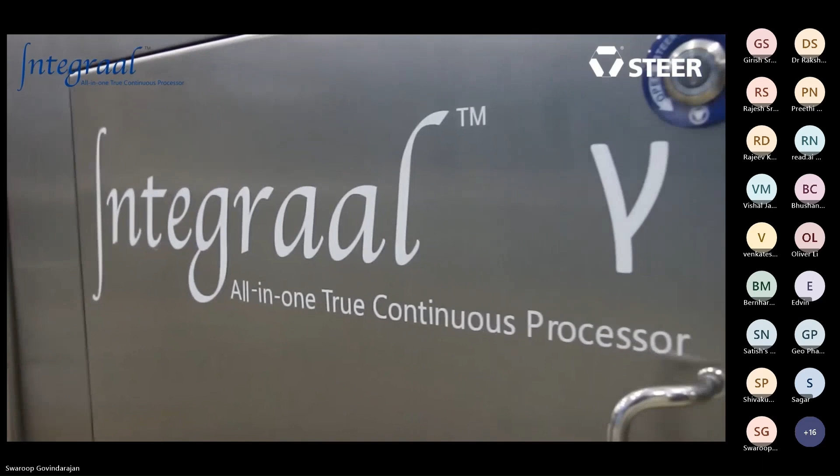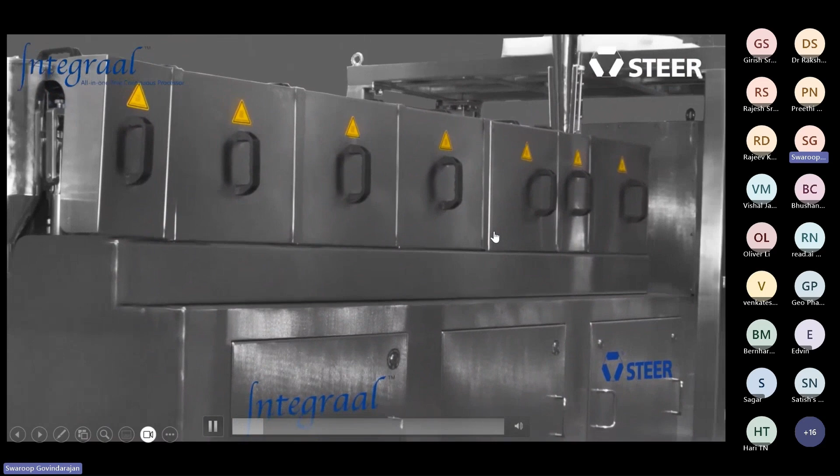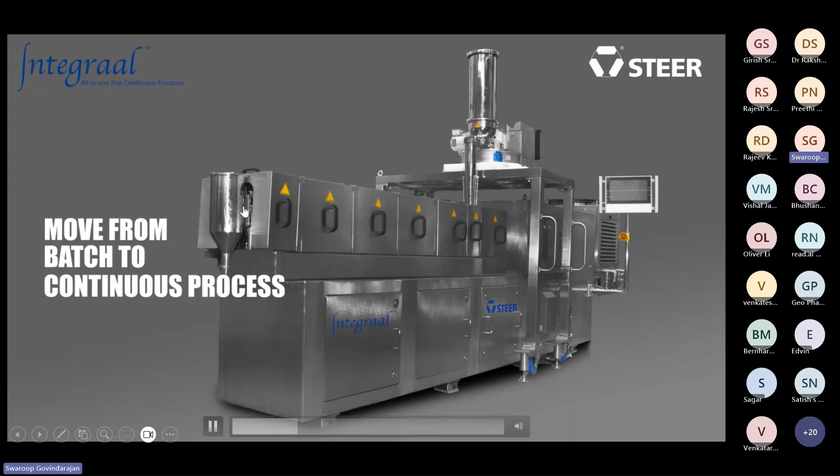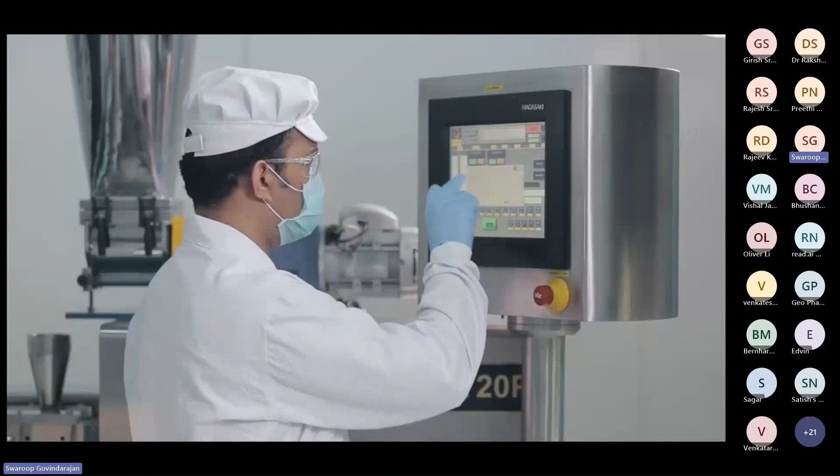Technologies. Our advanced processes and platform technologies change the way medicines are made. The pharmaceutical industry faces a dire need to move from batch to continuous processes in order to safeguard from regulatory stricture disrupting the business. By using a self-contained, self-cleaning vessel that can transform the bulk material properties in a single step during a very short time interval, we are addressing the most pressing need of the industry in making optimized granules towards preparing the final dosage form. The manufacturing overheads, footprint, and number of processing steps are vastly reduced, bringing long-term sustainability and overall equipment effectiveness. There is greater energy efficiency and negligible waste management, leading to a greener process.

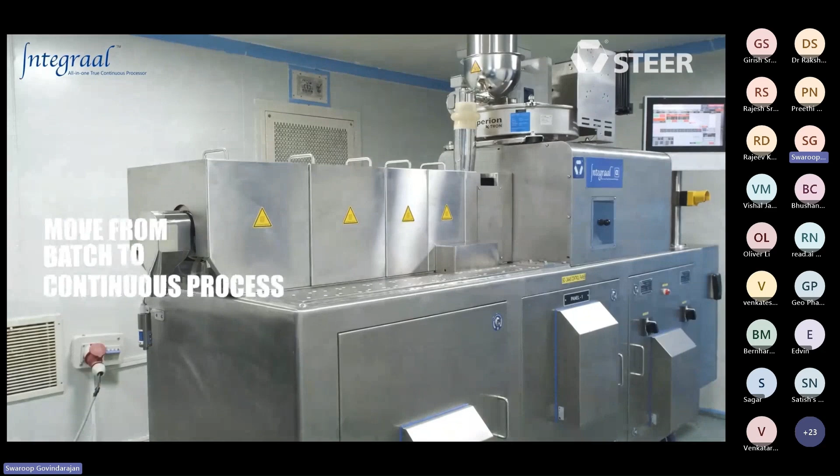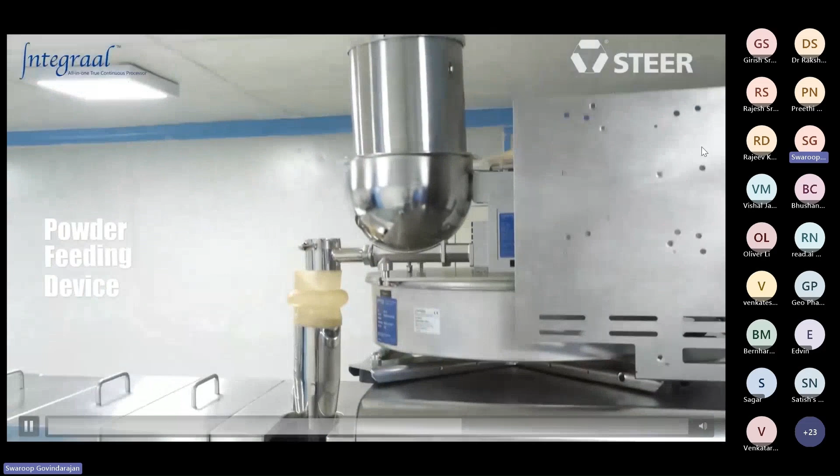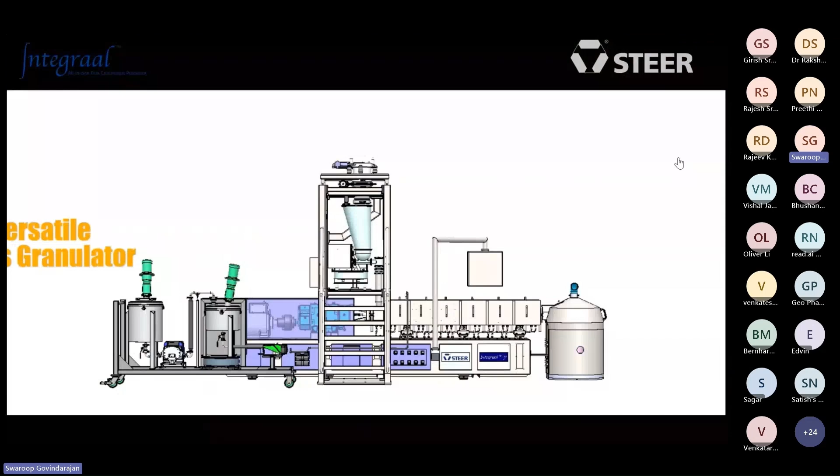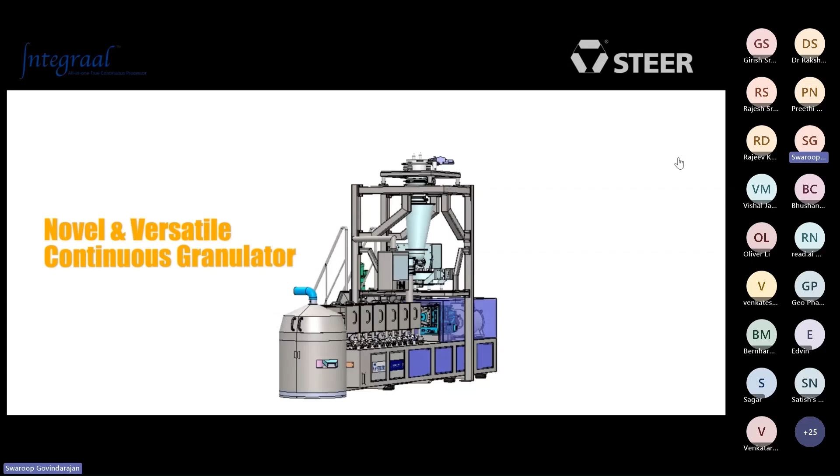Here is a brief description of the process in an Integraal granulator. Powder material is fed into the Integraal granulator either by weight or by volume, either as split feed, that is, individual components separately, or as a powder blend. The granulating liquid is pumped in separately for a wet granulation process. The material is mixed, wet massed or kneaded, heated or cooled, and simultaneously goes through a controlled process of agglomeration and deagglomeration. The granules thus formed exit the Integraal granulator through a pneumatic transfer system under negative pressure into a collector, and either continuously or intermittently transfer directly to a blending step, typically not needing further milling.

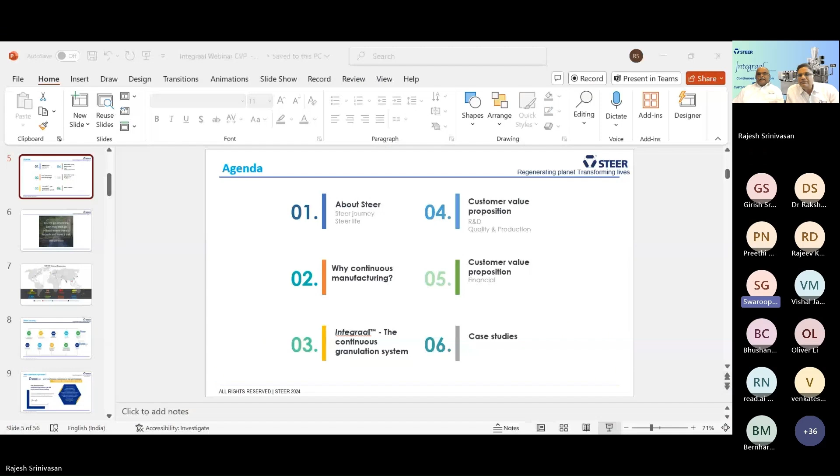I will cover Steer's journey and Steer Life journey in brief, followed by explaining why continuous manufacturing is needed from an industry perspective. I will also give a brief perspective of Integraal's features, the schematic, and how it compares with other options currently available in the market.

After that, Rajesh will talk mainly on the customer value proposition, a value to R&D, quality, and production. Finally, Rajesh will give the financial value proposition as well in his presentation.

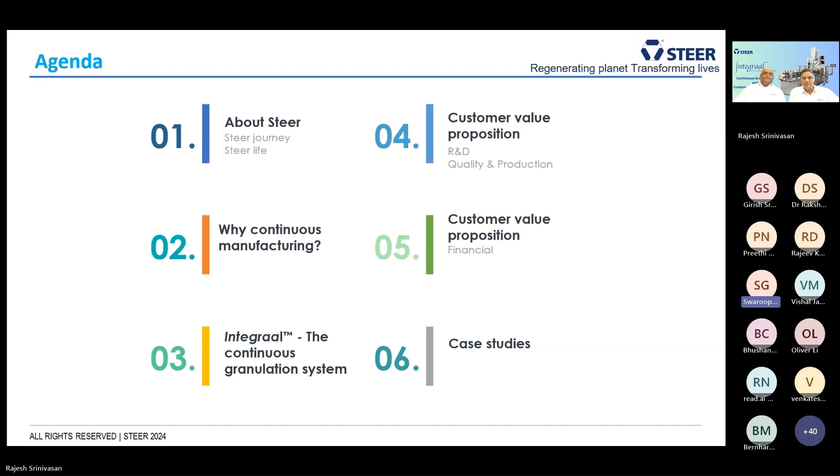When we started 10 years back, the journey of Integraal, Ralph Waldo Emerson's statement is very inspiring. We took a very unconventional path. 10 years back, there were no case studies of wet granulation or melt granulation using twin screw or a screw for pharmaceutical application.

We found people averse to listening to anything that is high shearing for granulation. As we all know, granulation requires a delicate balance of many energies, whether mechanical shear or temperature. However, we opted for the unconventional path and started working on twin screw for making a truly continuous granulation, which is today known as Integraal.

Coming to Steer's global presence, Steer Group has 4 application development centers in India, Japan, China, and the US. We have 5 global offices, 2 in India, and 1 each in Japan, China, and USA. We have presence in 50 plus countries, with installations over the last 30 years, and we have a group of 500 plus employees.

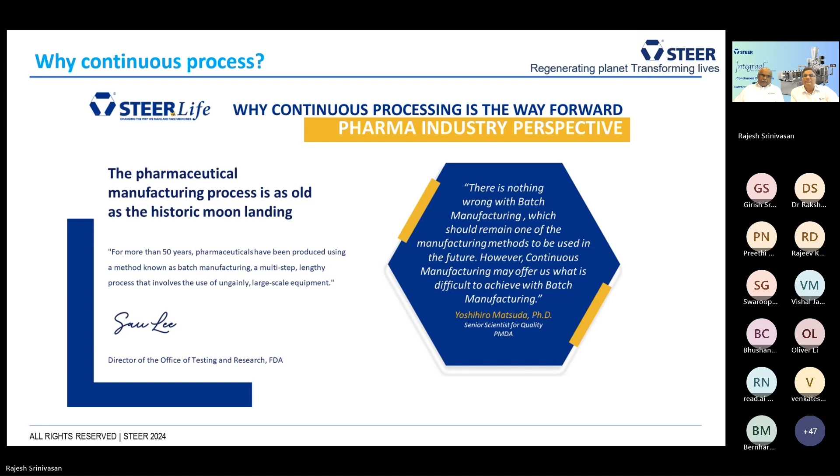Coming to a brief history, FDA started this initiative way back 15 years ago. We all know the FDA Novartis initiative at MIT. Dr. Janet Woodcock made a very strong statement on why batch process is being abandoned in favor of a more cleaner, flexible, and efficient continuous manufacturing.

So it was a good platform where she invited industry researchers to collaborate. Many originator companies joined, and one of them, Robert Meyer from Merck, sees that the next 20 years is going to be a time where adoption of continuous manufacturing is going to give advantage to the industry in terms of both quality and cost.

On the other side, Markus Krumme from Novartis indicated that in a flow chemistry segment, we have the possibility of developing something which is very difficult to do in a batch reaction, such as handling a dangerous compound, for example hydrogenation. So these are examples from the early days where industry experts emphasized the importance of continuous process.

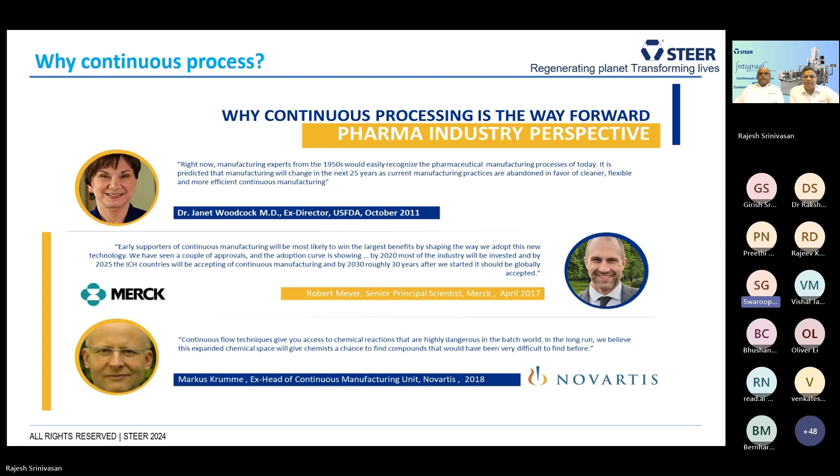So we are talking about Integraal, which makes the batch process, multiple batch steps, into a single, truly continuous, all-in-one granulation system. I'll give more information on the Integraal as we progress.

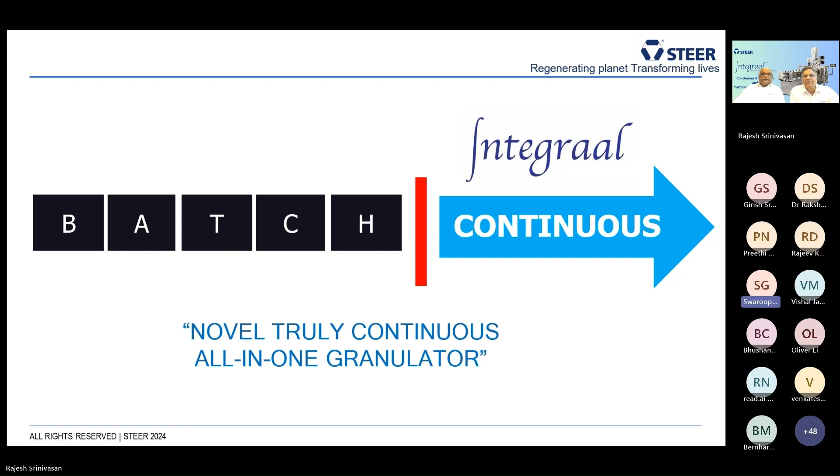So we all know how a batch process works, particularly for solid oral dosage form manufacturing. After dispensing, what we see in a typical granulation suite is that binder is prepared, and granulation is carried out either in a fluid bed granulator or a rapid mixer granulator.

In dry granulation, we have compaction. Once the granulation is done, whether wet or melt, it is required to be sized through a milling operation. Followed by, once the granules are sized to the requirement, we go for post-granulation blending for lubrication so that we are prepared for the subsequent tablet compression.

Followed by, if the product is coated, today we have a batch process, and even a few companies have adopted continuous coating process. Packaging typically is a continuous process.

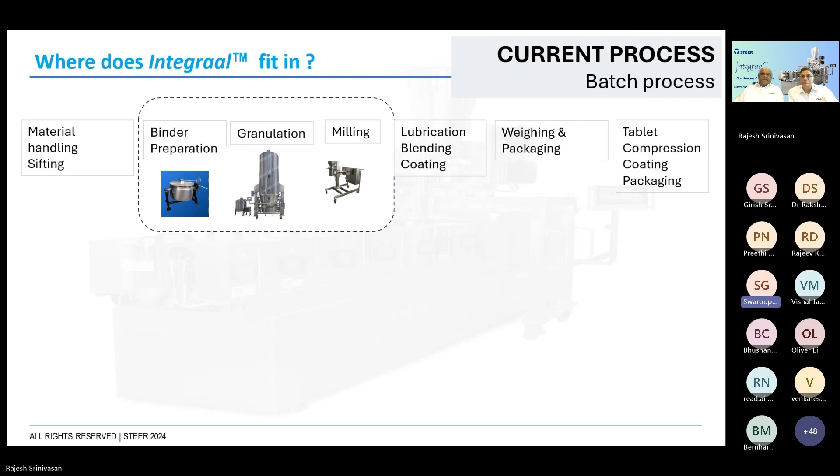So what we saw is that the granulation process today, if you see, remains a batch process and more so very, very subjective in nature. Now moving forward, what we see is that Integraal provides a combination of many steps during the granulation process by a single-step granulation system, where you have the ability to put binder into a continuous flow stream of solid particulate system.

And we can use this for both wet granulation and melt granulation. Today, if you see, there is hardly any continuous melt granulator. So Integraal provides the ability to do both wet and melt in a continuous flow.

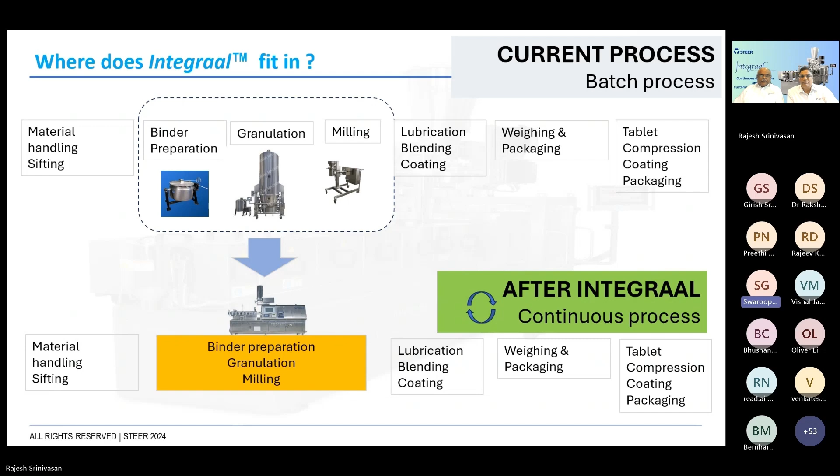Integraal also helps in milling or sizing to a greater extent. However, as we all know, the size of the granules depends on the size of the tablet, so the final sizing happens like in a batch process, by milling, by integrating with a mill. The remaining processes that exist today can be integrated seamlessly with Integraal so that the entire manufacturing stream becomes end-to-end continuous manufacturing.

It means there is no need for dispensing material before feeding it. The dispensing of each individual ingredient takes place in the feeder itself, which is a loss-in-weight feeding system. You have a record of dispensing of each ingredient. Alternatively, I have also seen a few companies preferring a pre-blending step, where multiple ingredients are blended and fed as a single stream by a loss-in-weight feeder, but the feeding stream remains single.

Once powder enters the processor, we have in the upstream a liquid feeding system which feeds liquid either gravimetrically or volumetrically, and it remains in sync with the solid feed. So therefore, the recipe of both solid and liquid remains unaltered during the entire process.

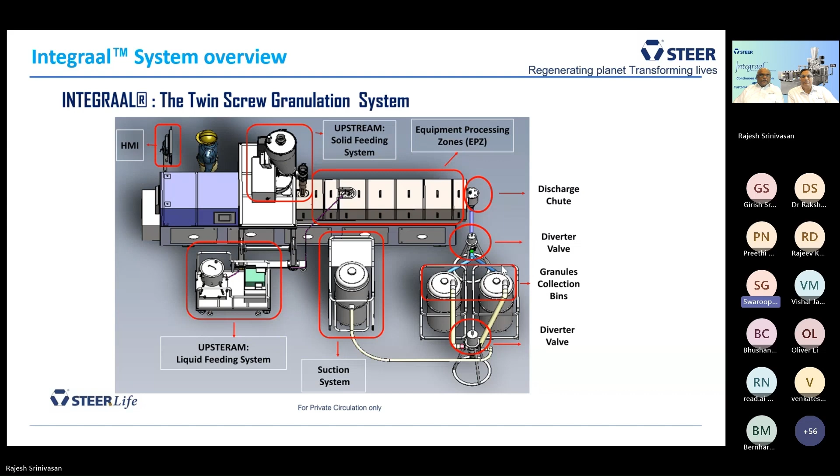So in a typical lab environment, we collect material in a container which is static. However, for a large installation, for a large capacity Integraal, we have a way to keep the continuity till the mill by screw conveying and keeping the condensing system in front of the machine.

Now, let us understand the differentiation from what is today available by other options, which we believe is still a 20th century continuous twin screw. Twin screw gives you a continuity of stream. However, lack of control makes it 20th century. Let us talk about the various aspects.

Typically, when we see particle size distribution of feed material, most of them are less than 50 micron. And in an agglomeration process, we are required to produce a unimodal distribution of particles ranging from 150 micron to 750 micron. However, most of the time, traditional continuous twin screw provides a bimodal distribution, which is depicted on the right-hand side as two modes.

Apart from that, because of lack of control on the shear, the granules produced are typically rod type or flaky type in structure, which is not stable during the further downstream processes. I have observed many times these granules, because of the flaky nature and asymmetric morphology, break during subsequent downstream processes. These are all related to lack of process control.

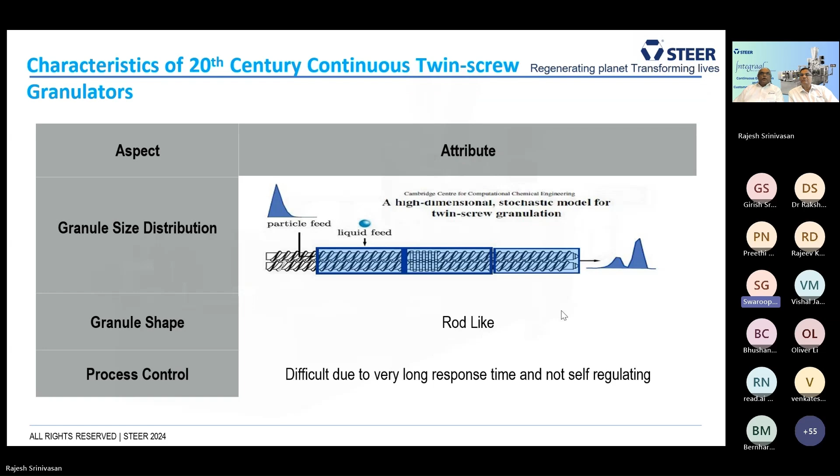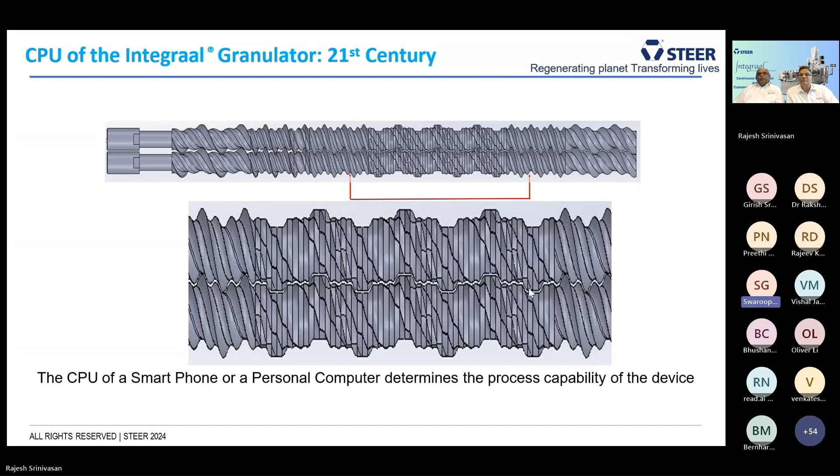Heart of the twin screw continuous processor Integraal is fractional lobe, which Steer invented in the early 2000s. We are using a lot of fractional lobe geometry, particularly for doing the work. Now, let me explain what advantages we get because of fractional lobe processing.

In a typical 20th century bi-lobe processor, there are a lot of hotspots, and hotspot is undesirable shear stress, which gets formed particularly when you are processing at high throughput rate or high temperature. This is bound to happen, and therefore you see a lot of non-uniformity in the porosity or density in the granules. On the other side, if you look at the 21st century fractional lobe processor, it eliminates those hotspots because of its unique geometry.

And therefore the granules look more symmetrical, much more uniform in size, and provide a unimodal particle size distribution. On the other side, dead zone is typically a part of running a process at low throughput rate. When we are not able to run a process at high speed, we carry a risk of creating a lot of dead zone where the mixing is not very efficient. These are the challenges related to traditional processors.

Whereas the Integraal processor has fractional lobe and can be run both at slow and high speed. And therefore, the biggest advantage of using Integraal is we have an operational window which is quite wide, and therefore we have much more flexibility at steady state.

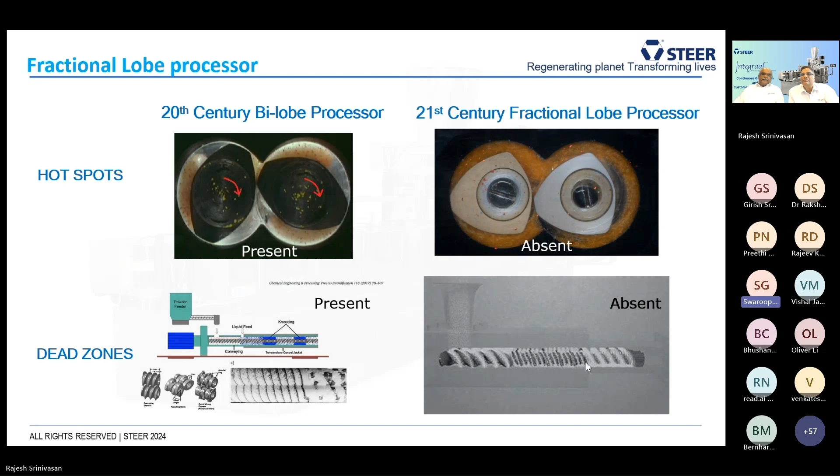Now moving on, let us compare Integraal with other available options for continuous technology. True quality by design - Integraal offers true quality by design because we are not depending on checking or monitoring of granules and therefore adjusting the processing parameter. We rely on the design of elements and design of the processor, which ensures product quality at a steady state from one end to the other end of the processor.

In terms of product quality, while we see other processors are able to keep good throughput, Integraal is far superior. In fact, our Integraal is able to produce from 1 kg to 1 ton per hour throughput. And these are all possible through the specially designed fractional lobe in the processing zone.

Apart from that, if you talk about continuous endpoint determination, since traditional continuous processing relies on a feedback mechanism, you need a PAT tool. On the other side, Integraal has a very good relation between the processing parameters and the end product quality or granules quality. So therefore, with good monitoring of the processing variables, we have very good assurance of the granules quality, which is available all the time.

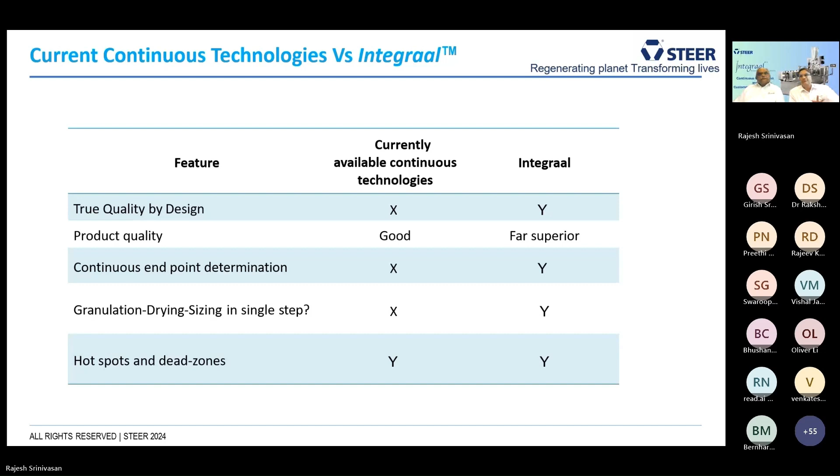In terms of application, we have numerous case studies, both in pharmaceutical and nutraceutical area. For example, we started applying Integraal for high volume pharmaceutical products like metformin, paracetamol, and ibuprofen, all in immediate release form. Then we went for high dose APIs - tenofovir, naproxen, and lumefantrine artemether - for granulating those granules. We have very good data available for these products.

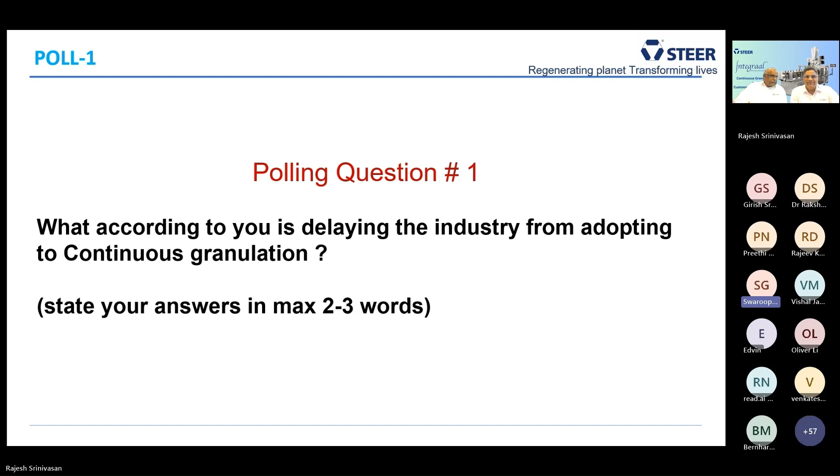Therefore, I would like to present what is in it for the customer to adopt Integraal. Some of these reasons we have stated here are very clear. Integraal has got the potential to grow the bottom line and the top line of your organization, especially if you are in solid oral dosage form where you are manufacturing in bulk. It straight away hits the bottom and top line exponentially, and we have got enough data to prove that to you. As Indu mentioned, Integraal produces superior quality granules in terms of porosity, uniformity, and shape, which reduces the compression power that you encounter in tableting eventually. Clearly, it came out as a winner when we did a lot of trials and tests.

One of the most important reasons why we believe we should adopt Integraal is energy. Currently, the world is moving towards more efficient processes, harmonious with nature. Every industry is changing towards that, and pharma should not be an exception. I personally did a lot of work calculating energy requirements between traditional processes versus Integraal, and it's very clear that current batch processes of manufacturing granules consume quite a lot of energy in terms of power, water, air, steam, etc. Whereas with Integraal, it substantially reduces, and we have done trials and tests to prove that. I would really urge people to look at energy as one of the key levers for you to change to continuous. That's one good benefit.

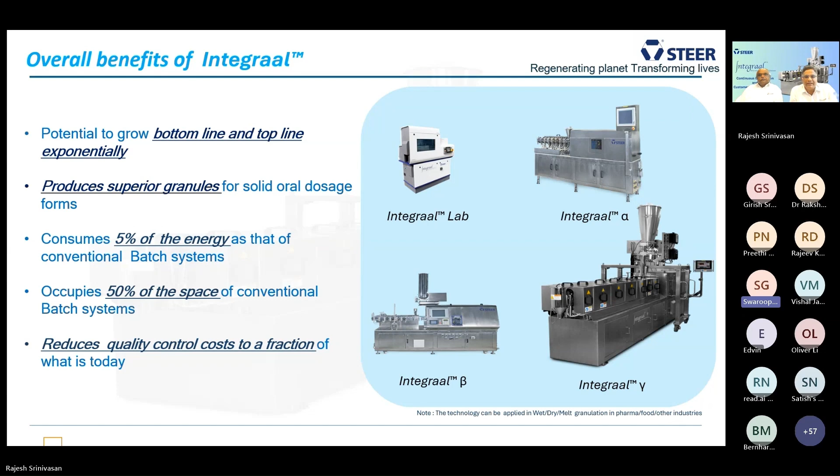So the value for a customer or anybody who wants to get into Integraal, we have divided into three distinct phases. One is R&D, R&D and quality related value, then production operation, and then financial. These three components are very important to consider while we go for any new equipment, and some of these reasons have been outlined here. Through Integraal granulation, you have very excellent temporal and spatial control of the product that's getting through, which means we have control over time and space.

As the granulation happens, we can vary a lot of parameters which are very much in our control, like speed, screw configuration, temperatures of heating, temperatures of cooling, agglomeration. All these parameters can be controlled at every step very easily in our processor, and therefore the desired product attribute can be obtained in a controllable manner in terms of time and space, since it's a continuous process.

Second, the energy transfer which happens as the agglomeration happens is very efficient here, because of the usage of the fractional lobe processor. We are minimizing the shear peaks or the pressure peaks as the material travels through the processor, and therefore the efficiency of the energy transfer is very, very high as compared to any bilobe or traditional processing equipment. The third reason is the technology is very versatile, as Mr. Indu was explaining.

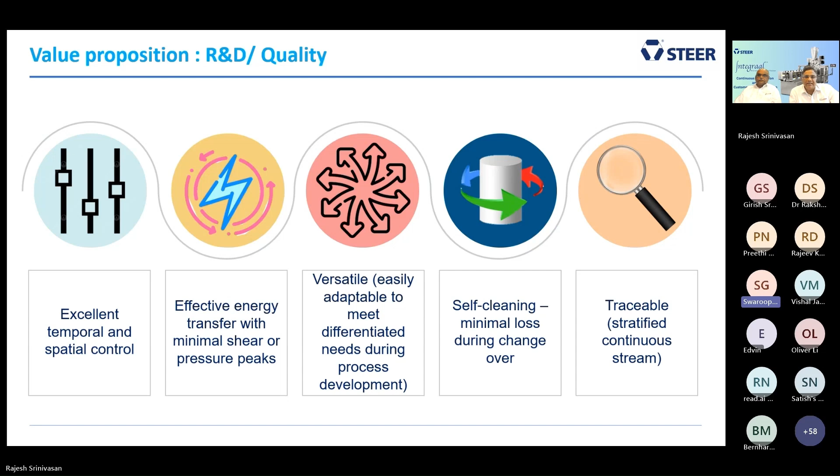Now, as Indu spoke about granules, right? It's all about now we are talking about granules done on a continuous basis and what happens to the quality of the granules. Some of our tests which we have done in the past, this is one representative sample of hundreds of tests that we would have done.

As you can see on the left-hand side, what you see is the granule shape and size of a traditional bilobe processor using twin screw process, whereas the right-hand side is the granules that you are obtaining through a fractional lobe processor. So in terms of the shape, the size, and the uniformity, the Integraal processor produces a superior shape of the granule and also the uniformity and the size.

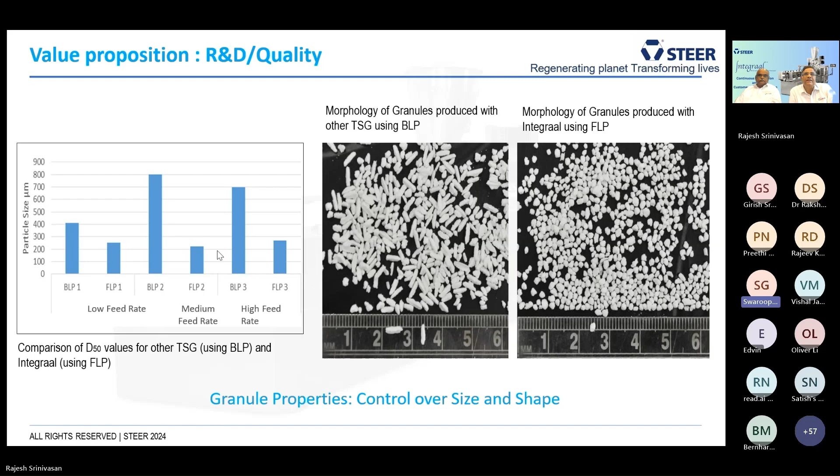And as we can see in the left-hand side graph, which is the D50 particle size distribution using a twin screw granulator with a bilobe processor and Integraal with the FLP, you can clearly see the difference that the D50 values are much better for a fractional lobe processor than a bilobe. These are data that we have created after we have done several experiments and tests.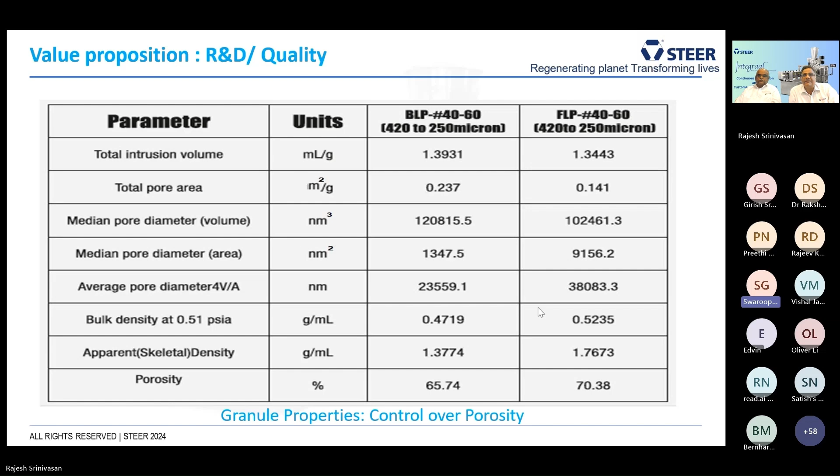As you can clearly see, 70% porosity can be achieved through the Integraal for a micron size of 420 to 250, which is tested data that we have got. So porosity effectively means better compressibility in the downstream, lesser energy consumption, more uniformity, and better friability of the granules, as all of us know.

So these are some of the key points to remember in terms of process dynamics across a wide range of throughput. As Indu mentioned, the Integraal has a capability range currently from certain grams per hour up to even 1 ton per hour in terms of scalability and continuous process. For the entire range, we have very good process dynamics, a dynamic steady state that we are able to achieve by the processor.

The symmetry of granules we saw earlier is much more symmetric, much more spherical, and much more uniform as the granules are getting formed in the Integraal, which is quality by design. So we don't have to actually control it at every stage. By design of the processor, design of the elements, and design of the control parameters itself, we are able to achieve the quality of granules, and similarly control the pore diameter, skeletal density, weight uniformity, and friability.

So we have done tests with friability of tablets, which Indu will present during the case studies. Clearly, Integraal granules are coming out superior, and Integraal tablets made out of Integraal granules for several molecules have come out far superior than traditional processes.

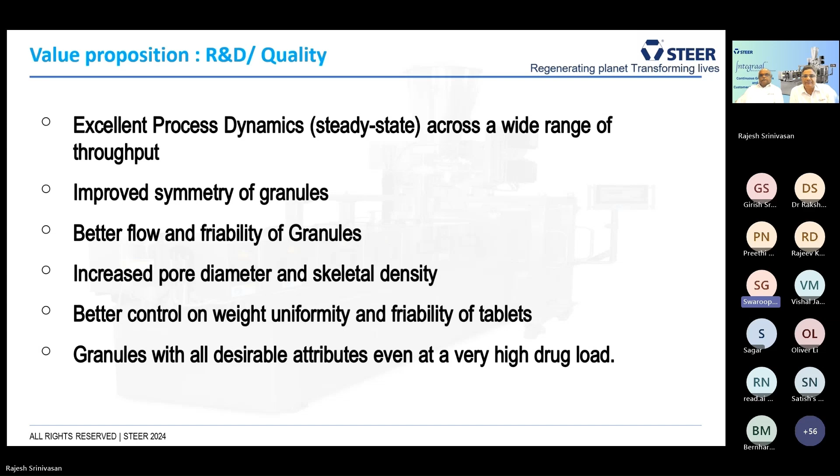Now, apart from that, there's several other value that the R&D person and the quality person will be able to feel when they actually run the equipment and see the granules. But we'll move on to some of the production operation issues that people do anticipate - okay, this is a new technology, this is a new thing - so what are the issues coming out of production, and what value will we see from this equipment?

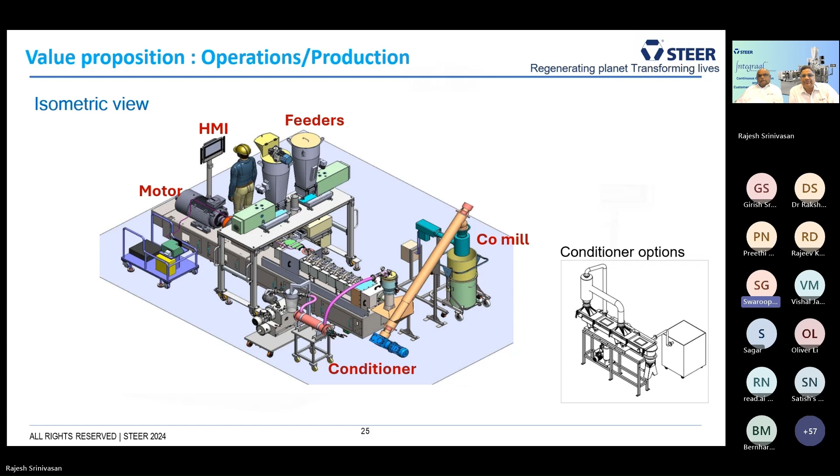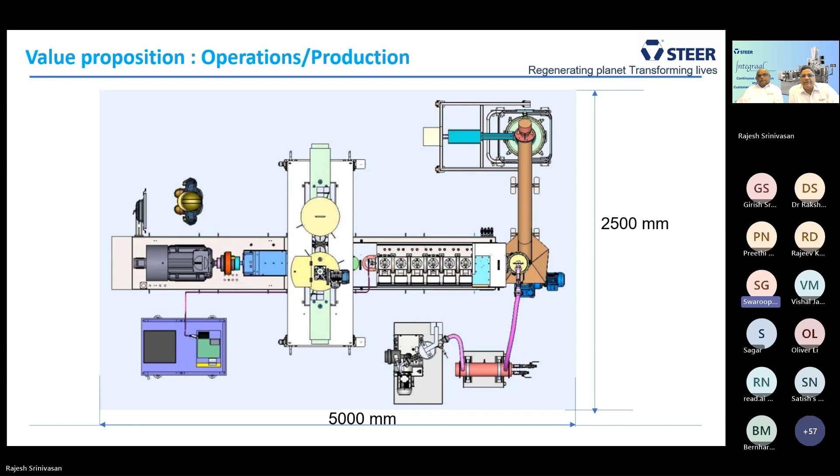So what are the other key things that Integraal offers to the operation production people? Processing time - the time for which granules are made in a batch process, compared with a continuous process, is in seconds now, because the granule passes through the entire length of the processor in a maximum of 30 seconds. That means we have better controllability.

The number of unit operations are minimized, as Indu showed in the first chart. Several batch processes starting from blending, feeding, sifting, then using the fluidized bed granulator, and then sifting again - all of these are combined into almost a single step process. Thereby, the overall number of unit operations is reduced, which results in lesser manpower, lesser energy, lesser time, and puts lesser stress on the system as a whole. This is something production people will be able to reciprocate with us easily.

Of course, the cost of manufacturing granules through Integraal is substantially lower, which we will explain in the next section. Footprint will be much smaller in space compared to a traditional system. Quality control is by design, and therefore operational issues - since quality is controlled at the design stage itself - are reduced. What's typically encountered by production people are issues coming up during running of equipment because the design philosophy was not quality oriented. In our case, we take care of all quality aspects at the design stage itself. Therefore, we don't see problems coming up every now and then.

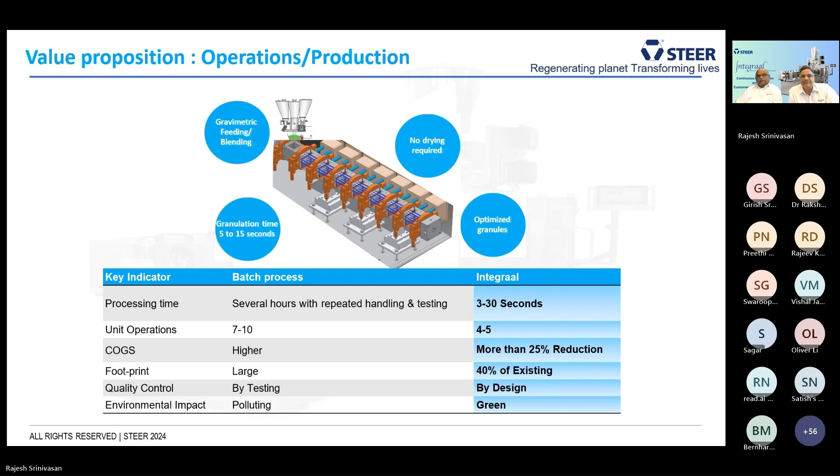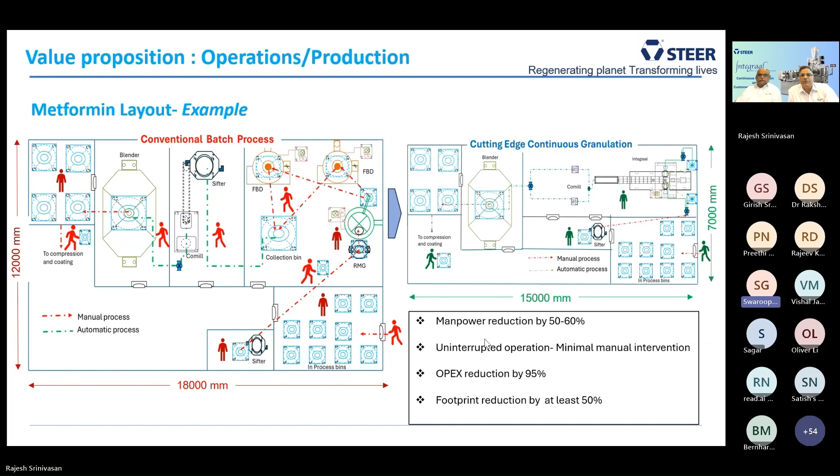Let's move on. I will briefly touch upon a financial calculation, which again will vary from country to country, place to place, and molecule to molecule. But having said that, we have taken a very popular oral solid dosage form and some industrial standards, and we've done very detailed calculations on what it takes financially, what benefit the customer gets if they adopt a continuous granulation loop. So the technology piece is pretty well covered, the financial incentive is something we need to really look at, and therefore we did a deeper study.

So where does Integraal actually add value apart from, let's say, the product superiority, ease of operation? These are definitely there. Apart from all that, the energy, the OpEx needed to run a batch process versus the OpEx needed to run a continuous process through Integral is extremely different.

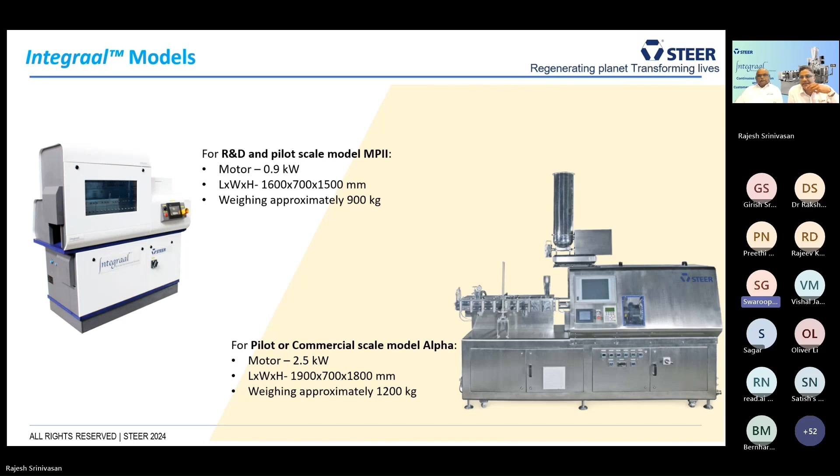So we've got the MP2 model, the Alpha model, which is the next scale and can still be deployed at commercial scale for lower throughputs. Then we have the Beta and the Gamma. They are very nicely engineered machines, aesthetically appealing to the eye.

We are inviting you to our factory to see many of these models available with us. They perform very silently, with a noise level much less than 85 decibels at 1 meter. It's all adhering to international standards and pharma standards, needless to say.

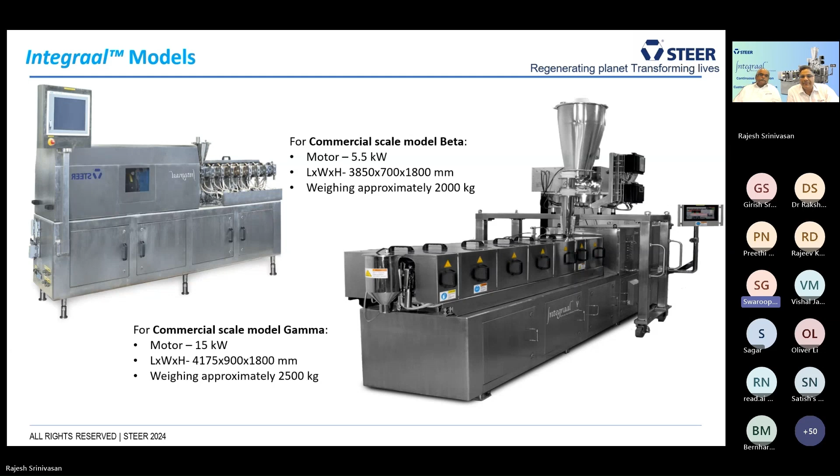And the Gamma that you're seeing currently is capable of very good industrial scale output with uniform granules and properties. So to summarize, this table approximately gives you the throughput possible through different models of Integraal, shown in kilograms.

So let's take a Gamma machine. A Gamma machine running for 1 hour with paracetamol can produce 150 kilograms of dried, sized granules for you.

The same machine, if run with metformin, can produce higher output, up to 200 kilograms. That's what this table is showing. We have run most of these paracetamol and metformin molecules plus additional molecules, and these are all proven numbers with us. Also, Gamma Plus is under development, and scaling up is very easy in this technology. We don't see a major challenge in building a Gamma Plus quickly, and it can really scale up operations in a very profitable way with the quality that you need.

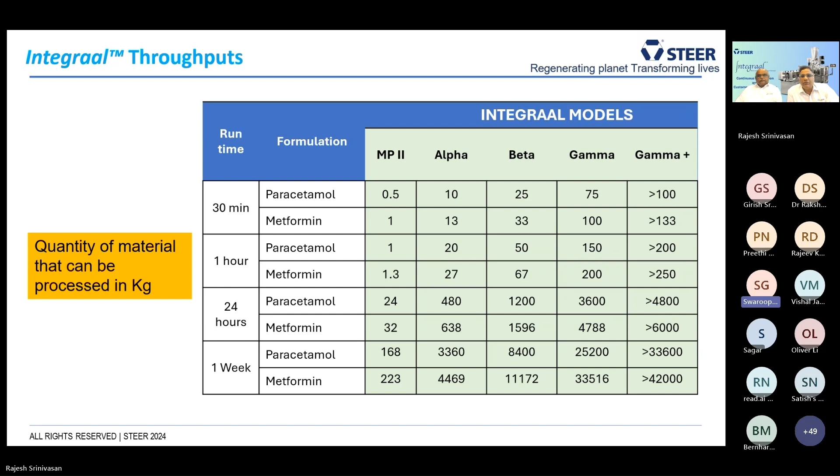With that, I will move the presentation to Mr. Indu to take us forward on the case studies. Thank you, Rajesh, for the wonderful insight about the value proposition to a customer, whether it is production, quality, or R&D. Thank you.

So now I will go through quickly with the two case studies. In front of us is a wet granulation for metformin immediate release. This is traditionally a high volume product prepared every day in tons, so we tried it in early days. Typically, it is produced at shop floor as 95% weight by weight granules for compression. We used binder PVP at 5% of the total weight of the granules. If you see the system, Integraal has an agglomeration zone followed by drying, sizing, and discharge.

The dried granules were then characterized for particle size, given in the table on the left-hand side. We also checked granule properties. Looking at both tables, granules have a unimodal distribution and met our customer requirement of particle size distribution. The right-hand side table indicates how good the flow is, shown by Carr index and Hausner ratio, indicating excellent flow properties with LOD approximately 1.3%. These are typical attributes of granules produced by Integral for a wet granulated product.

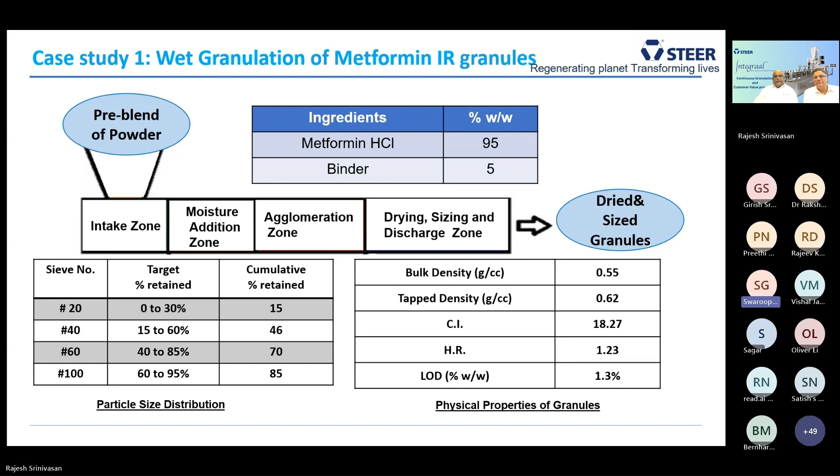We also went for tableting these granules, and we wanted to see the performance of the finished product, which is the tablet, how it looks. That also met the specification very well, within the specification.

And DT -- many times people ask how it is going to affect the DT, because the world still sees twin screw granulation as a high shear process. We have come out of that paradigm, and we have umpteen case studies where we can tune it from high shear to very low shear or no shear, even as evident in fluid bed granulation. So depending on customer requirement, without changing any qualitative or quantitative composition, Integraal provides great ability to process material. That became very clear in the last 2 years during our trials, and we can even match the final product performance, clearly evident in the table in front of us.

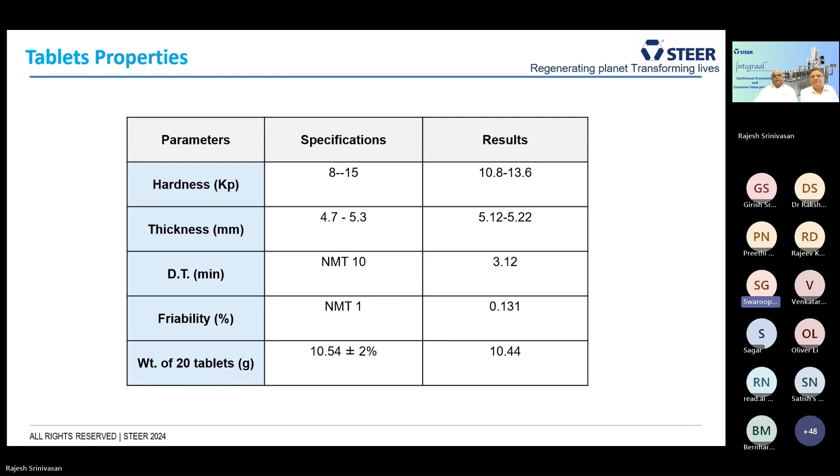We also looked into the morphology, and as Rajesh was talking about, we compared it with the traditional lobe, the integer lobe. There we saw that twin screw granulator typically produces flaky material, probably because of no control in the process. When we started this journey, we saw a lot of reluctance and apprehension in people's minds -- how can a twin screw granulator work for so many difficult and high volume products?

But on the other side, when we started using the fractional lobe processor Integraal, we saw that it provides great ability to customize as per customer need, composition, and specification of the final product. The picture on the right-hand side clearly indicates that FLP produces much more uniform and symmetrical granules with excellent flow properties and compressibility.

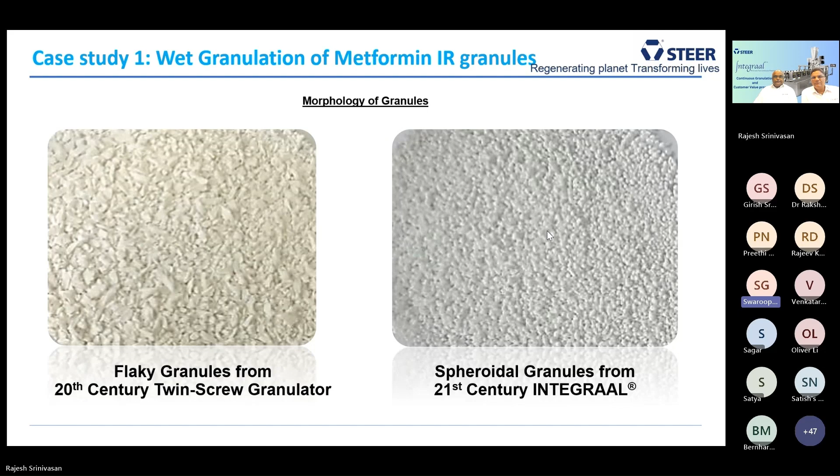Now moving to another example, again related to metformin, but this time we use a melt granulation approach, because Integraal can also be used for continuous melt granulation, which today I don't see many other options available for. In this case, we used metformin with a low melting lipidic material, glyceryl behenate, at 10%, for binding as well as release control. As you must be aware, metformin release control in many cases is controlled by HPMC, high viscosity grade -- in our case, HPMC K100M.

What we did is we did not use any liquid for granulation. We melted glyceryl behenate, put the blended material in the intake zone, followed by melt agglomeration primarily by glyceryl behenate, followed by cooling, sizing, and discharging from the processor.